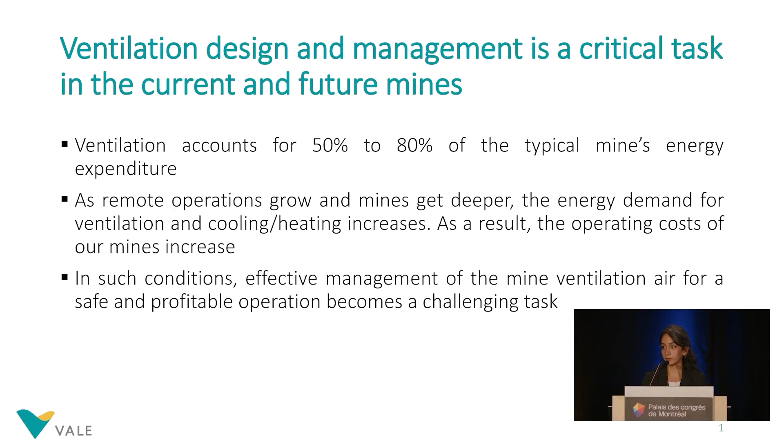So with that in mind, I'm going to walk you through a brief introduction to our Creighton Mine ventilation system. Here's a schematic of our ventilation system. The current capacity of our mine is about 1.8 million CFM, equivalent to 850 cubic meters per second. Surface air goes through a caved zone, which is from an old mining area, currently acting as a natural heat exchange area for the mine, conditioning the ventilation air.

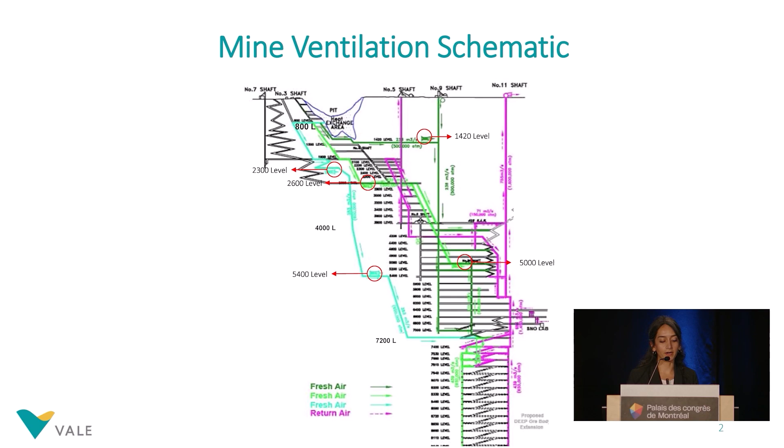Air goes through this NHEA area via three sets of intake fans on 1420 level, 2300 level, and 2600 level, highlighted in red circles, in series with two sets of booster fans on 5400 level and 5000 level. They all are in feet, just making sure we're on the same page. And then all the air entering the mine is collected on 7200 level, from there going down to deeper parts of the mine. Currently at Creighton, we are on 8500 level deep, and our studies are looking at 9500 level and even deeper.

So as we are done mining in the upper country, we preferably start looking into opportunities to reduce airflow to those levels that we're done with, or close them down, to be able to redirect the air to deeper parts of the mine where we are actually operating. And that was basically the basis of this ventilation changeover that we went through. So what we were dealing with was we wanted to redirect about 150 kCFM of air from an old mining area, which is about 4,000 to 5,000 level, an old mining zone, and redirect it to deeper levels below 7,400 level where mining is actually happening.

The assessment process we went through had three key steps. We started with looking at the infrastructure requirement. We looked at existing raises and drifts, what's their use, what's their size, what's their capacity in terms of velocity and resistance. Can we use this existing infrastructure, or do we need to put new ones? We looked at our existing fans. Do they create enough differential pressure to allow moving this volume of air to deeper parts of the mine, or do we need to upgrade them? Do we need more power? And ventilation controls, where do we need to add a wall, a louver, any adjustments, etc.

And then we looked at the implication of this change to our life of mine plan. As I said, we are looking at 9,500 level and even deeper in the future. So is this in line with those production targets? As well as looking at the old mining area, like these levels that we are pulling air from, what do we have left there? Are we going to ever go back and do mining? Do we have some key infrastructure such as electrical substations, backfill stations? Is this the main emergency exhaust path for the mine? Just verifying those requirements throughout the mine.

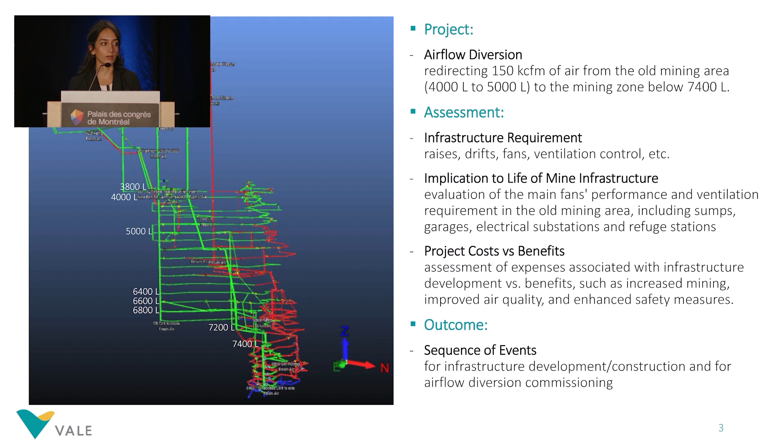And then it comes to actually how to commission this change, like what are the sequences of the event to ensure that this change has minimal interruption to the existing mine system. So as I said, it was about 150 kCFM of air from 4,000 to 5,000 level. What we had in terms of existing infrastructure was our number 9 shaft, directing all this air down to 6,800 level, which is the bottom of our cage currently, and then 6,800 is used as main commute for our mining personnel, as well as people working at SNOLAB, which get access to 6,800 level here.

So we have velocity limits for this area, and it's currently out of capacity, so we really couldn't send more air. Then we had to start looking at other options on how to make this diversion, redirect this air from those levels to the bottom of the mine.

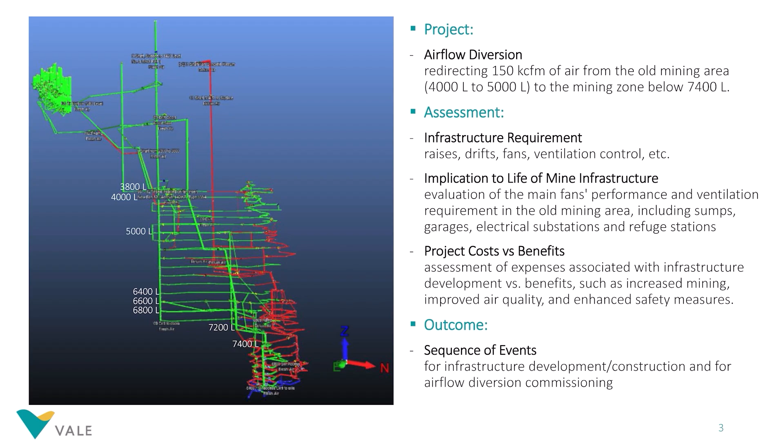Working with mine design people and geotechnical people, a new location was found. I was not part of the team at the time, but a new location was found to put in a new raise, connecting 6,400 and 6,600 level, using these two levels as air transfer drifts for the air coming from the old mining area, and directed to 7,200 level, which is the collection area, and then from there, sending the air down to the bottom of the mine. So again, with ventilation modeling and calculations, we came up with two 150 horsepower fans on each of these levels working in series, and we showed that this arrangement would make no changes to the main mine fan performances.

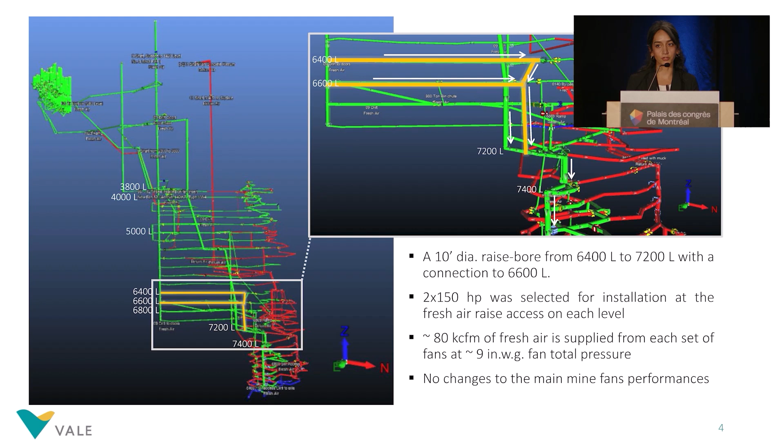So at this stage there was a lot of back and forth between ventilation modeling, like Ventsim Design use, versus what we think would actually happen in the mine based on experience and what our calculations showed, what actions we needed to take, and what were the stages of commissioning. So what I've put together for the next few slides is 3 examples of what actually Ventsim showed us, what actions we took, and what we actually saw in the field.

So the first one is that the model showed us once we commissioned the 2 sets of fans, a total of 4 fans, on 64 and 66, and redirected the air from the old mining area, it would cause a leakage on the top levels, since we're closing down these areas to pull from down. It causes a leakage towards our 11 shaft main exhaust raise on 3,800 level, 200 kCFM.

So we believed it. What we planned was to adjust the louver accordingly. This is part of the mine's emergency access, so we had to maintain a minimum velocity, and that was 30 kCFM. And that's actually what we saw in the field the day that we were commissioning. We did the measurements. We saw relatively the same amount of leakage on that level, and we adjusted the louver, and the issue was resolved.

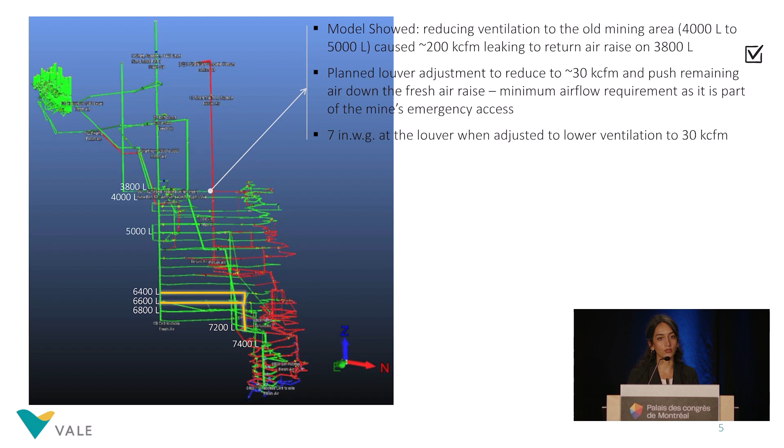The second thing we observed was that once commissioning the fans on 6,400 and 6,600 level, the model showed us that we would see increased pressure across an airlock door that we had by the booster station on 5,000 level. We were hesitant about what we were seeing in the model, especially because we knew our model is not well reflecting the area as it is in the field. So what we thought was, let's wait and see what actually happens, and if we need to get the construction crew involved to change that door, or add another airlock door to it, or find a way around it.

And as expected, that was not what we saw in the field. We had a damaged door there, and it was having a little bit of a leakage, about 15 kCFM. And that's an example that we didn't have the right information in the model, and we didn't get reliable results out of the modeling.

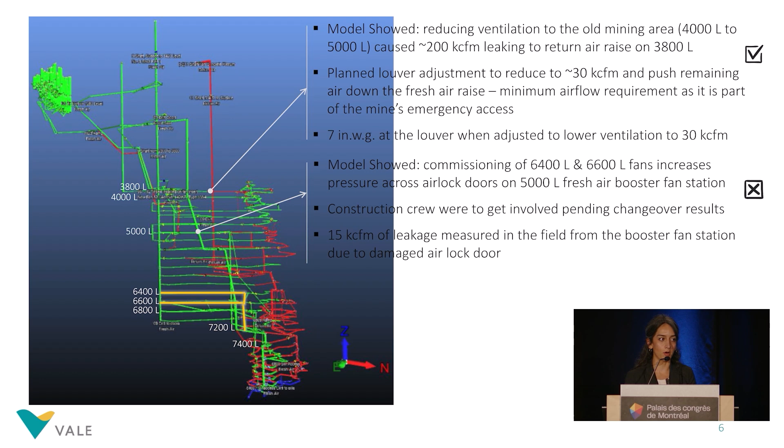The last one is the fan performances that we were seeing from our model for both series of fans that we added to the system. Once we had it commissioned, the pressure sensors we had installed by the fan stations were showing a different number than what we expected in the model. We followed up with a handheld reading, and we realized our sensors were damaged. So again, we had another source of reliable information from our model and the calculations to work against, verifying the issue with our sensor installation, and that was addressed as well.

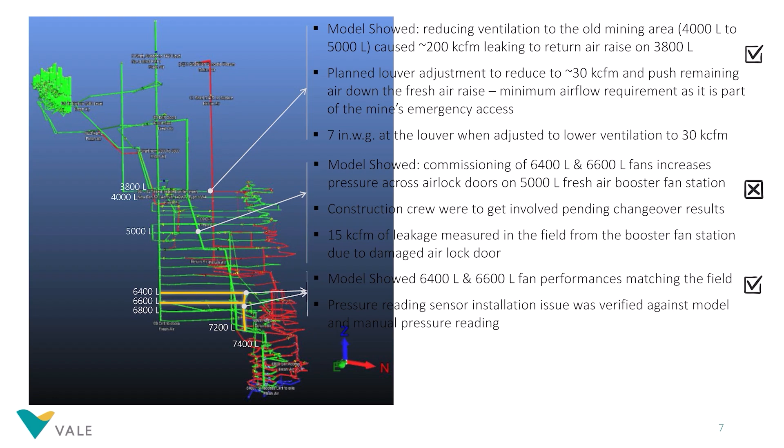So a few conclusion points here. I think we all agree that Ventsim is a good tool for simulating and analyzing our underground mine ventilation systems. But this is another way of saying, and a statement that was repeated a couple of times throughout the day, garbage in, garbage out. So our model's accuracy heavily relies on the quality of the information that we put in.

What we practice within Vale, and I'm sure other companies do the same, is that we always rely on first principles and fundamental laws of ventilation. So every time we do a ventilation modeling using Ventsim, we go back and verify it with actual manual calculations. Does it make sense? Is it correct or not? So I highly recommend that, because in that way, you would know if you really can rely on your model, if it is reasonable, if you can use it to predict behaviors or not.

And of course, calibration is not a one-time thing. It's a continuous act. You have to continuously collect data, have your database updated, and compare what you see in the model against what you see in the field, add more information. All the PQ surveys measured throughout the day can be used, in the old mining areas especially, that are for life of mine infrastructure.

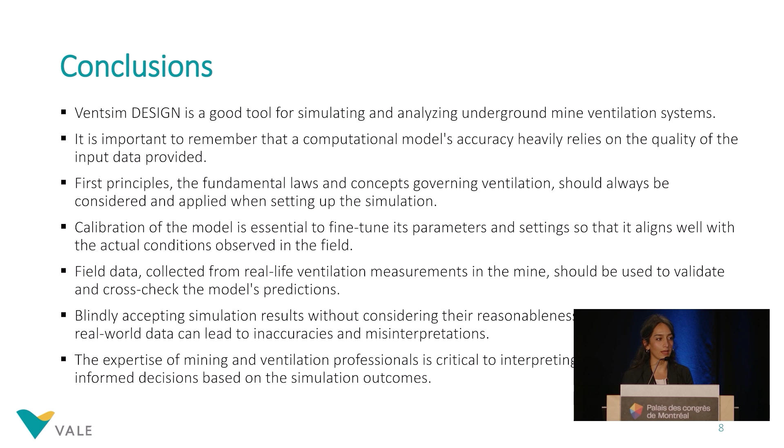And the two last points were repeated one way or another throughout the day. Blindly accepting simulation results is quite dangerous. Ventsim is an easy tool to use. It's very user-friendly, and makes everybody feel comfortable and confident to do ventilation modeling. But actually, you require some expertise with a mining background as well as ventilation knowledge to be able to understand whether what comes out of it is reliable or not.

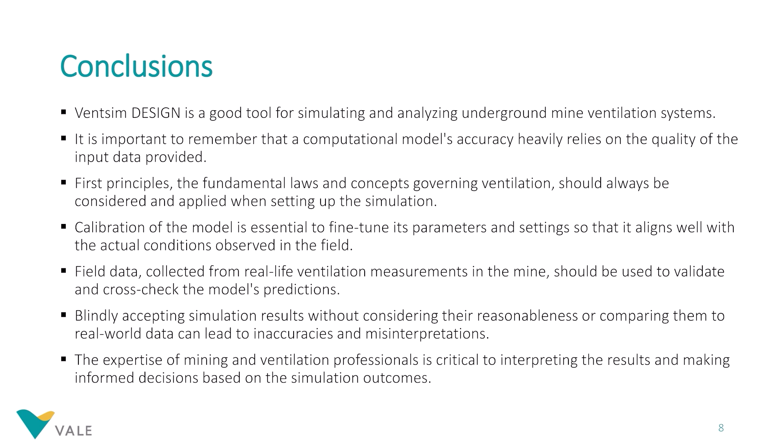So I think that's a message that all the presentations conveyed today. Be careful when you use such a useful tool. It can be dangerous at the same time that it can be very useful for our design in the future.